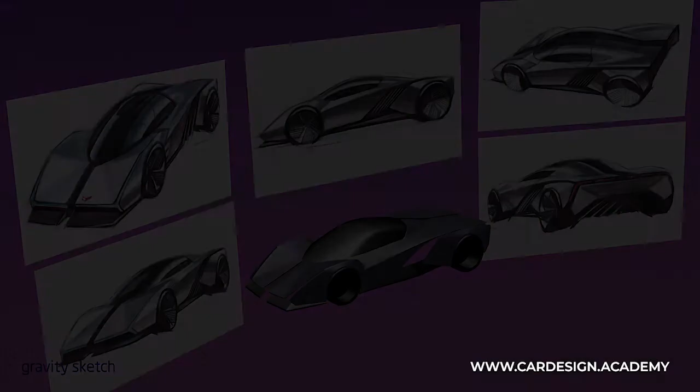Welcome to CARDESIGN.ACADEMY. Today I'm going to get started on the exterior model for my Dark Synthwave next-gen Corvette concept, and I've chosen this environment and color scheme.

It's very in keeping with this retro 80s synthwave look with the big floor grid, really trying to capture this planar, geometric surface language with very folded surfaces, very minimalist, with a strong exposed heat sink pattern that repeats throughout the vehicle, which is functional for displacing heat from a high-powered battery system.

In the last video, I set up the vehicle package using a set of wheels I built to a known set of dimensions, the C8 Corvette wheels and tires, then placed the sketch in the environment at life size along with the mannequin. So I have everything I need to start a competent model, so let's get started.

This tutorial will show you how I approach designing an exterior, and you'll see it can be done quite rapidly. This is my exterior layer, so I'm going to go ahead and get started.

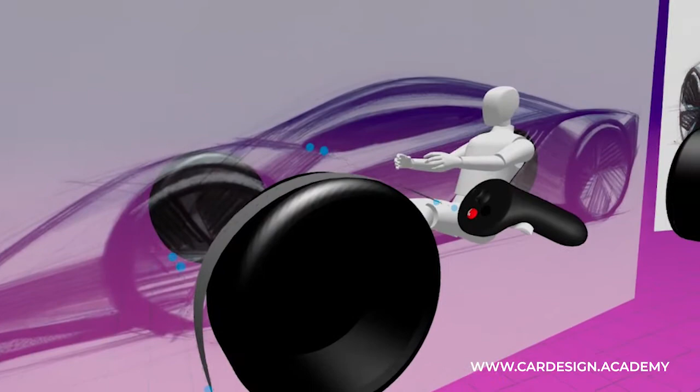I'm going to get that adjusted a little bit, grab the points, and get it aligned in. I'll turn it back to smooth view later, but you can see I'm using Smart Move, where I align my controllers to do a nice even movement in a single axis.

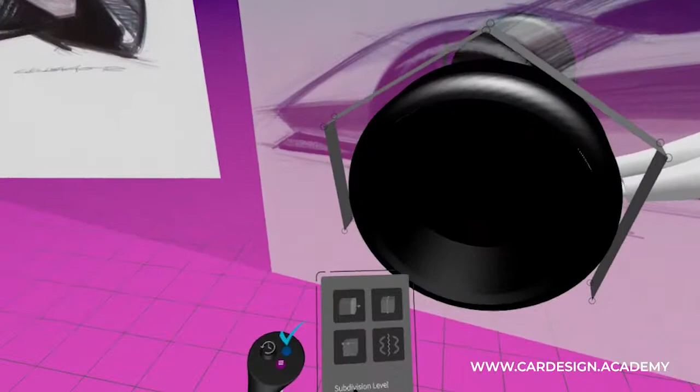Turning it back to smooth view, you can see it's starting to become quite tight and concentric to the rim. I'm just going to tighten up the front here a little bit, and that's looking quite tight, quite even.

Then I'm going to grab the entire inner row of control points. I selected auto select loops, grab this whole section and slide it in, and then create a back wall.

I'm going to use the extrude function. As I'm grabbing this row, I pull the trigger, which extrudes an additional row of loops there. Then I grab those and start to scale them in.

If I go back to poly mode, you can see what I'm doing here. I'm just going to even that out with the ground. You can basically shrink this as much as you want, and I can even take this down so it's nice and even with the ground. You're not really going to see it, so it's not super critical that it's perfect, but I try to get it as even as possible.

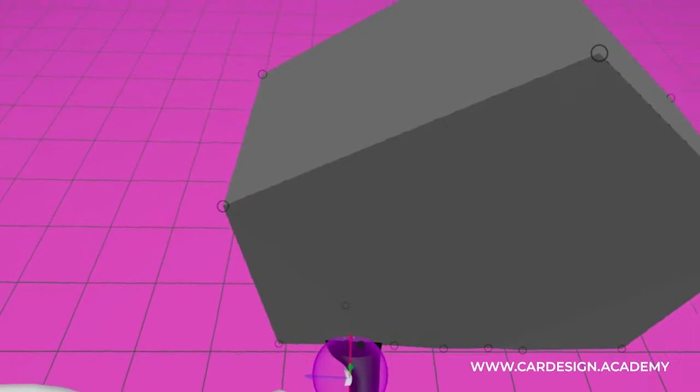I also want to get all of these more or less vertical. If I turn this back to smooth view, you'll see that it's a very soft shape.

So what I'm going to do is start to add edge loops to control and make it a harder edge. If I go to the polygon view again, you'll see I select one of the edges and click on it very close to the next point, adding another row of edges. When I go back to smooth view, you see it's a much tighter bend.

Just to show you again, I'll add it in smooth view and you'll see what it does, like that. If I want to tighten it up even more, I can either take this edge loop and shift it out even closer, or add an additional edge. You can see it becomes very, very tight at that point.

I don't think it needs to be that tight, as it's just adding weight and complexity to the model. I'll probably also add a couple of additional loops at the very bottom here, and then I've got it looking pretty good off the bat.

What I'm going to do then is take this in Smart Move. I hold the right hand middle finger button and pull the trigger, which duplicates it and slides it along the x-axis all the way to the rear. As you can see, I'm going to have to scale it up a bit as well, so I'm just going to scale that up.

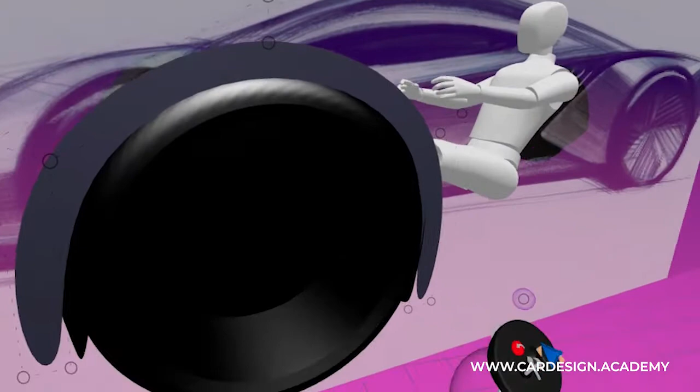Actually, before I get too far, what I'm going to do is grab this inner edge and add a hem flange to it. Because I want to tighten that up a little bit, since I want it to overlap the wheel tub.

And bring that up until the wheel tub is just about to be exposed. And it looks nice and tight and concentric to the rim.

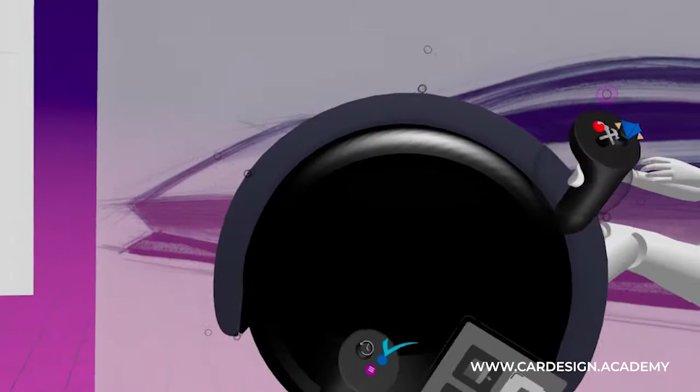It's looking pretty good. Bring it back down. Okay, so now this wheel flare's a bit thick. It looks a little trucky to me.

So what I'm going to do is add a row of edges here, and then grab the outer row and delete it. So that gives it a much thinner, slimmer look.

Okay, so now I've got to do the same to the rear. So I'm going to grab this one, duplicate it, slide it to the rear. Let's see, running out of space here.

Okay, I'm going to shift it out a little bit at the same time. Oops. So I'm going to grab the flare. As I'm shifting it back, I'm going to grow it a little bit. Okay, and then turn on my control vectors.

I think what I'm going to do this time is just simply add points here and delete here, so that'll kind of preserve my geometry. And just sort of tailor it to fit the wheel tub.

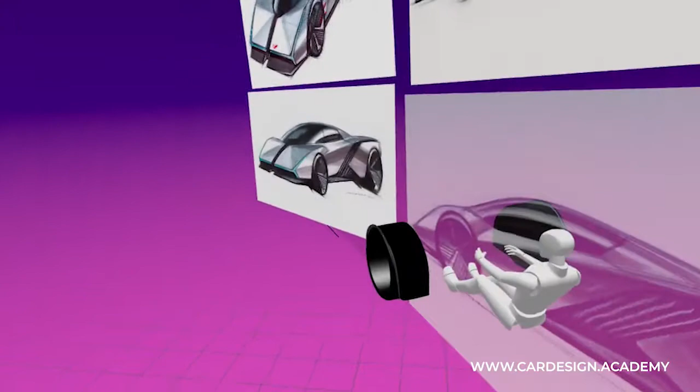Okay. You can see the wheel tub is coming, so the hem flange comes in just underneath that wheel tub. And just double check that. Double check the front. It's looking pretty good.

Okay, so very good. So the next thing I'm going to do is start to set up my center line. So I'm just going to go ahead and save what I have right now.

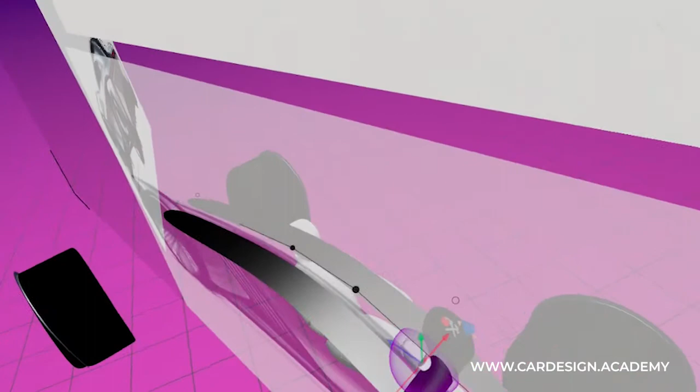Okay, and I'm going to grab the inner row of points, and as I pull them towards the center plane, you can see they just snap to the center plane. Everything welds together very nicely.

I can bring these out a little bit, and then I'm going to extrude another row, and bring that row down a little bit and start to add a bit of curvature.

And yeah, maybe bring it just a little bit wider.

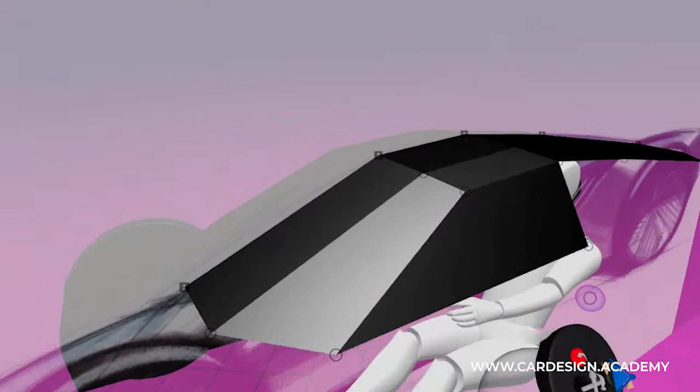And then I'm going to start to establish my side glass plane. So I'm going to come out with an extrusion here. Might be easier to see in Polyview what I'm doing. I'm going to grab this point and bring it to the front here and connect that. So you can see to connect a point, all you got to do is just move it close to another point, and it'll just snap together. So easy. Same thing back here. I'm going to snap that together and bring this all the way back to the rear.

So go back to smooth view. I'm probably gonna have to do a little bit of tailoring here.

Okay, so just to make sure I have enough width to this cabin, I'll bring this out a bit.

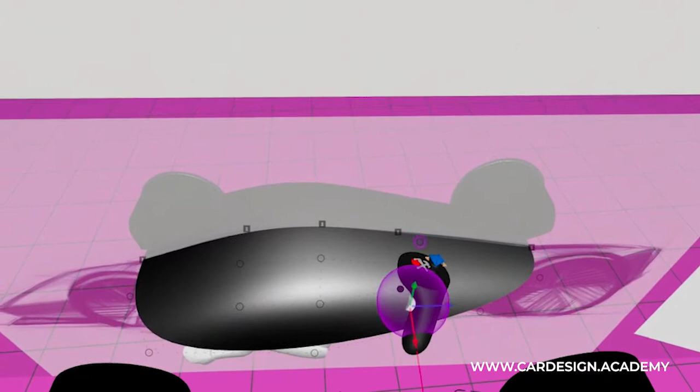That's looking pretty good right off the bat. You can see there's a nice, if you look at the sketches, there's a very wide shoulder. So there's a wide offset.

Oh yeah, one thing I do need to capture is this dip in the belt line. So...

I'm gonna add another row of points. I'm gonna bring that down here. Actually, no, I'm not gonna do that. What I'm going to do is bring the cowl down below the fender, because that's really what's happening.

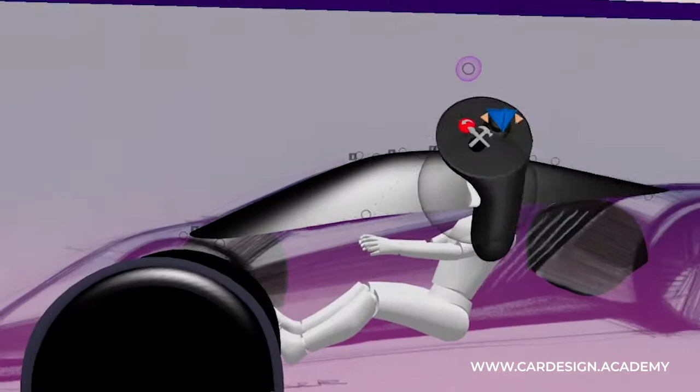So I can get rid of that edge there.

Okay, it's looking pretty good. Bring this forward a little bit. Okay. Not trying to get it too perfect yet. Oh yeah, that's looking good.

Okay, so I'm just going to do a quick check here. I'm going to turn off the side view sketch and just kind of look at it from an end view and make sure I have enough width to the cabin. Just make sure the driver's got enough shoulder room and headroom. And I think he's in pretty good shape.

I might just widen the cabin a little bit more. Maybe not, I think I'm just going to leave it as is. It looks like a pretty nice tight cabin.

Just going to double check the geometry here. Yeah, that's what I thought. Okay, so I'm going to just adjust a few of these points so I can get rid of some of the holes.

Yeah, it's much better. Okay, great. Okay.

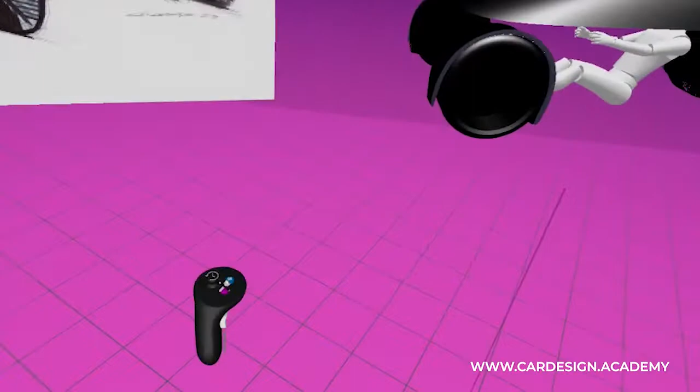So next, I'm going to start to build the body. Okay, so I'm actually going to label this layer. I'm going to put this on a separate layer and just call it glass. Glass. Okay, and then I want to lock this layer, start a new layer. And this will be the body, so I'm going to call this body.

While I'm at it, I better grab the wheel flats and wheel tubs. I'm just going to put those on the body layer. Okay, so now I can lock the glass layer. I can't grab it, it's not there.

So okay, so now I'm going to select my body color, and I'm going to turn my sketch back on, or my side view, and just move around the room a little bit.

Okay, so now I'm going to start building my center line. So on the front end, this upper line actually represents a fender. So I'll just build to the sketch first. But actually this is a fender line.

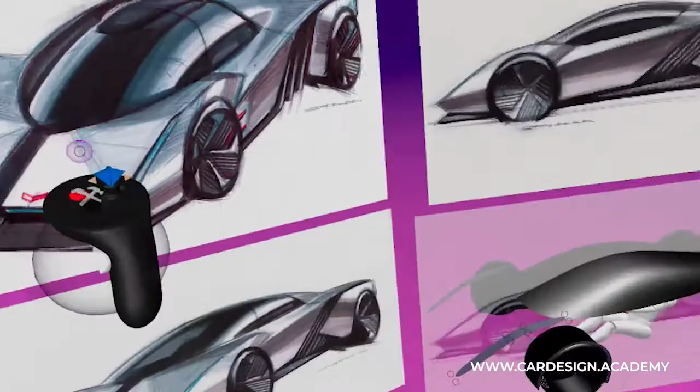So I'm going to shift it out and turn on my control points. If you look at the sketch, there's almost no plan shape to these lines. This is something new to me. I'm used to putting a lot of plan shape on lines, on curves.

What I think I'm going to do is just go to poly view, because I want this car to really have a lot of polygonal geometry to it. So let's get it right in the polygons first. It's very important to really just look at the car as a series of polygonal shapes.

Okay, so this is a very complex surface on the hood that I'm trying to do. I'm not going to get too deep into that just yet. What I am going to do is just build a quick center line, which is almost just a perfect extension of the windscreen.

So I'm going to grab that and snap it to center. I'm going to leave this in poly view as well. Actually, yeah.

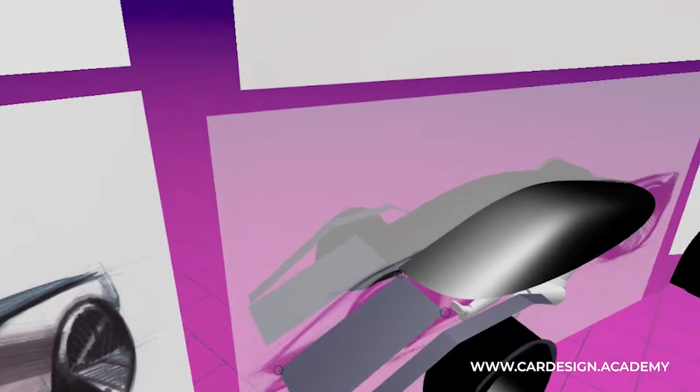I'm going to leave this gap in the center because that's what's going on here. So I'm going to bring this out and actually bring this point in to start to get that folded origami look.

Now, if I want to take two objects and bring them together, I'm going to turn on my tool set. Oh, no, not that one. Okay, this sort of brush and hammer crossing each other.

I'm going to hit that button, and I have a set of tools here. And what I'm going to do is merge. So I'm going to grab - I already have this object selected. I'm just going to click this object, and then these two are now one object. And now I can snap this point to this point.

Okay, and then what I can do is extrude a square off of here, connect it here, and not quite getting that. Okay, there we go.

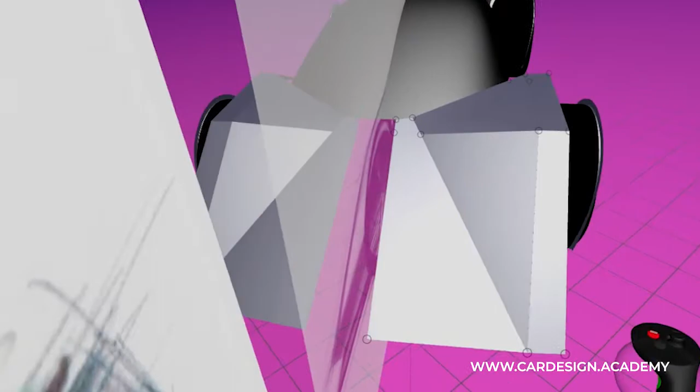So see, it's starting to get that kind of faceted origami look that the sketch has. So I'm going to leave that as is for now, and now I'm going to start to work on this belt surface. You can see this sort of belt and shoulder surface that runs all the way up the rear fender. I'm gonna kind of eyeball it and follow the sketch.

I'm gonna turn that on to poly view as well to make sure I've got the plan shapes right. You can see the plan shapes all over the place. So I'm just gonna work to get a nice sweep going there.

Okay, so not quite there yet. What I'm doing is I'm kind of sighting down the line and looking for any sort of snaking.

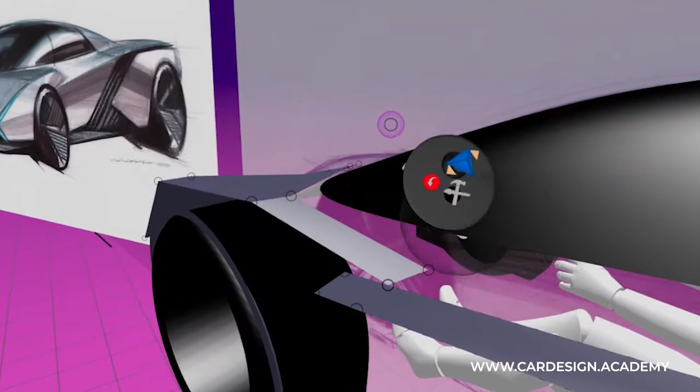And we'll work on getting the wheel lips attached as well at a later point.

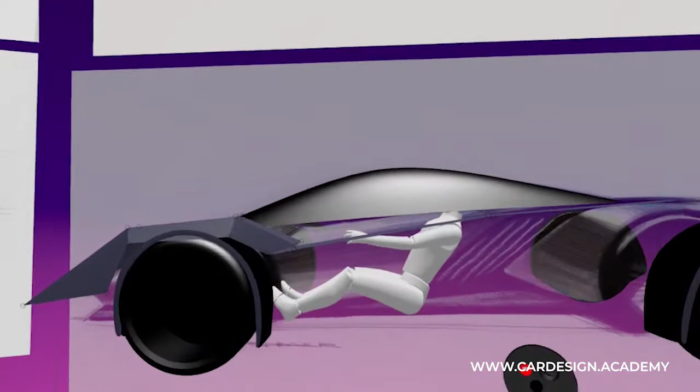Okay, so I just want to delete this point here. So that's all one surface. One thing you want to do as you're building polygons is you want as many surfaces as possible to be four-sided. So try to organize your polygons in such a way that everything is four-sided.

So one thing I need to do now is work on getting this shoulder surface brought up to the belt.

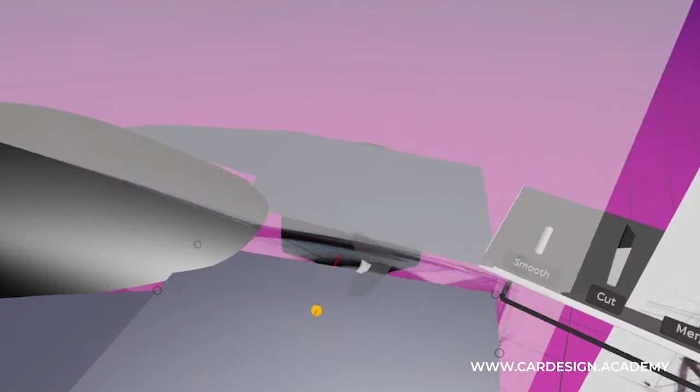So this belt surface or the shoulder surface is going to twist from almost dead horizontal to catching more light here. We'll see if that works or not.

And then I'm going to start to build my body side.

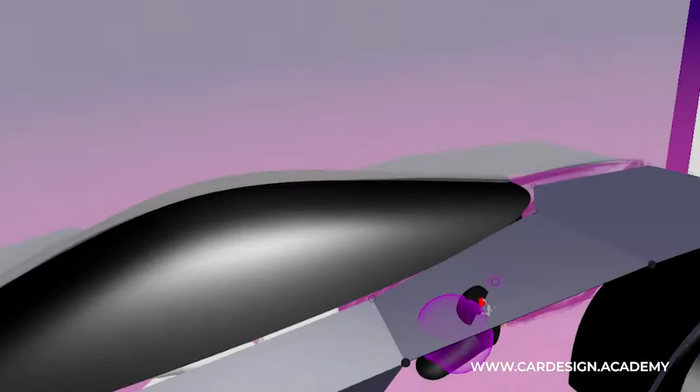Okay, so what I want to do is try and align this graphic. So I'm going to bring this line back and up a little bit. And that way I can bring this back to line up with the graphic. And I want that to cut sharply under so that it can really catch a lot of shadow.

Okay, and then this rear wheel volume is going to be a separate shape, so I'll get to that later. What I think I'm going to do now is begin to connect the front wheel.

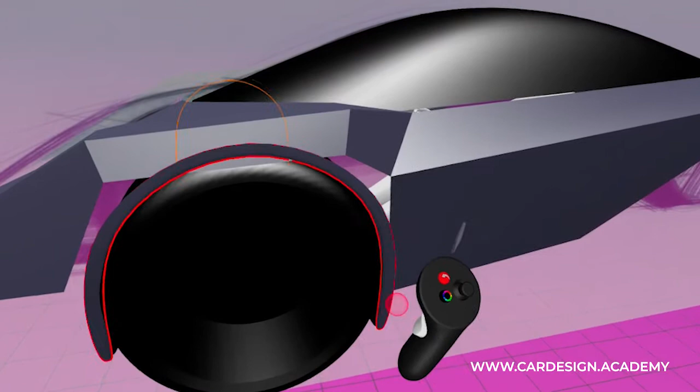So I'm going to select my tools here, merge them together. Make sure that I'm merging the correct thing. Okay, so you can see that the alignment of the polygons is quite different.

So I'm going to have to reorient my geometry quite a bit to get that working properly. So what I'm going to do is I'll just start working the wheel. So this is going to go way out of round, but we'll fix that. And it's nice that we have the wheel tub to work to.

I'm going to add another row of edges here. That's going to align my center polys here. Yep, align those. And then I'm going to add another row here. And that's actually gonna align this together.

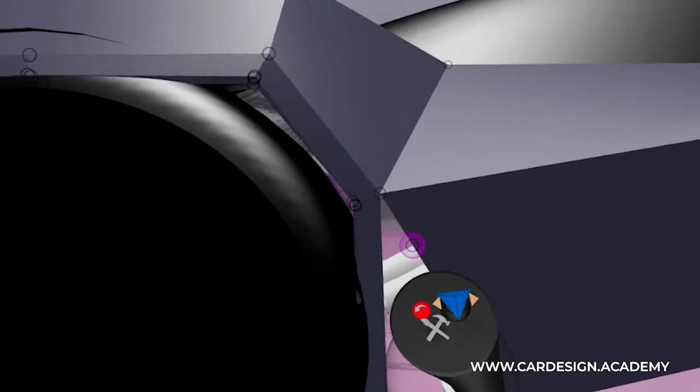So as I get down here, I'm actually going to add another row of edges right along here. This is going to give me a tighter break here, which I want anyway, and that gives me a four-sided shape to connect to my wheel flare.

Okay, so it's going to be very, very non-round, but we're gonna work on that in a minute here. I'm gonna add another row of edges here that'll connect to the front corner.

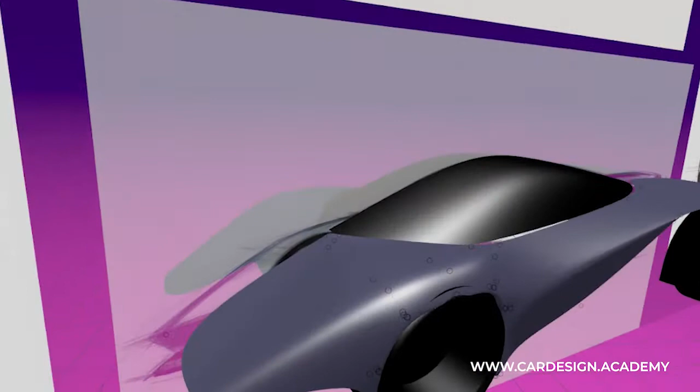Okay, so I'm gonna have to go in and retune this so you can see as I go back into Smooth View, everything is very doughy, right? We'll go back and we'll have an opportunity to fix that.

But really, what I'm interested now is just getting the wheel flat aligned here. Also, I just need to get a tighter edge on that wheel flat so I can see it.

All right, so I just want to grab this one. Okay, and just get this thing tuned back into a round shape. I may have to add an additional row here just to control that edge there.

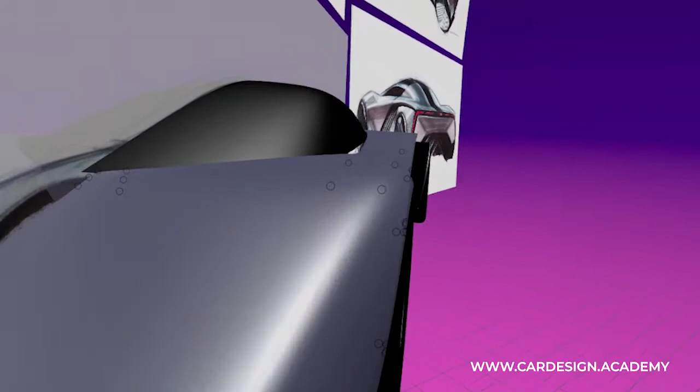That's starting to look round again. Very good. Okay. Turn my polys back off. So now I have the construction I want, at least in the wheel flats.

Okay, what I want to do now is to do this bottom corner. Okay, so as you can see, the bottom corner actually splits off and becomes the headlamp.

So what I can do is actually delete this surface here, and that's going to form a gap for the headlamp, and then I'm going to bring this back. Now the headlamp is a much slimmer shape, so I can basically bring this out to a sharper corner.

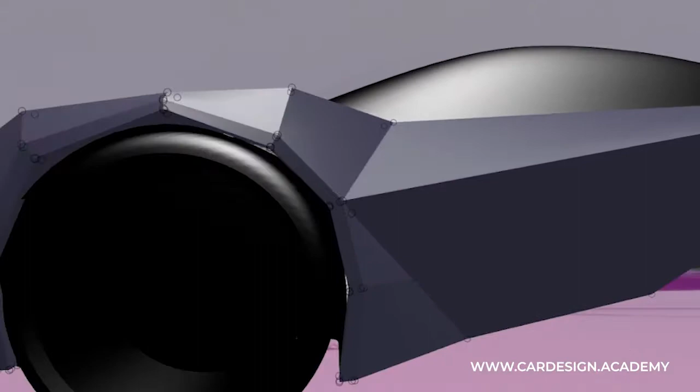Okay, looking good. Oh, this isn't quite connected. Very good.

Okay, so starting to get the theme here. It's still very rough, but I just want to get the whole car blocked in. I think we can drop the bottom of the front. Yeah, I'm just sighting it down the sketch here.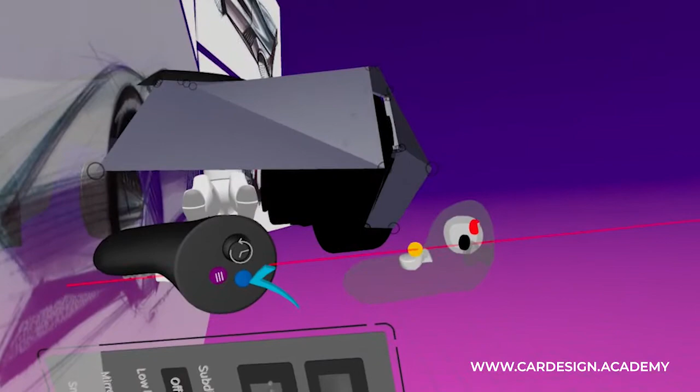Maybe bring this in a little bit because I want to have a more pronounced edge. Keep it kind of square. Okay, bring this in a little bit. We're going to be playing around with this thing quite a bit.

Okay, so I'm going to start building this rear section, which is graphically detached. So I'm just going to be working two polygons right now.

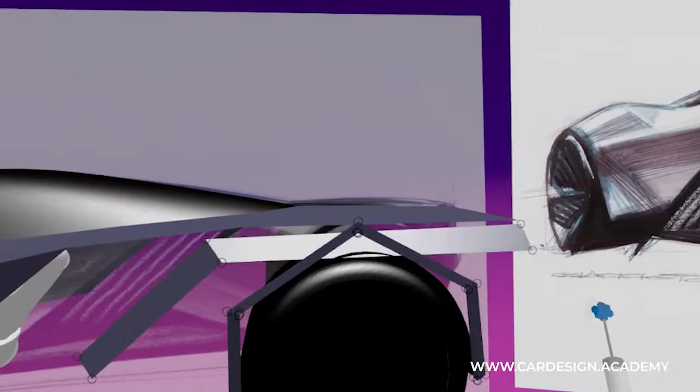I'm going to go ahead and merge with the wheel flat. There we go. That way I can at least start to align my polygons.

Let's turn it on again.

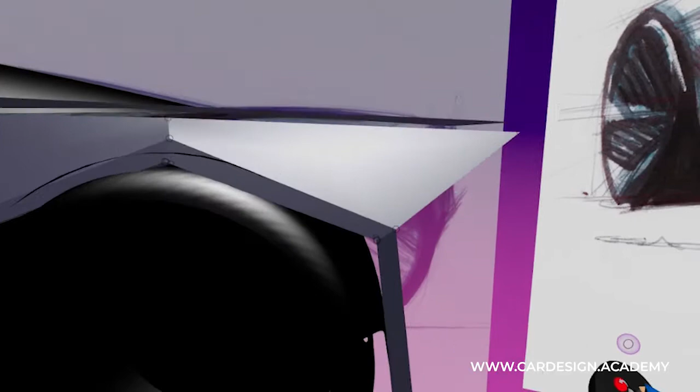Okay, and I'm going to put that tighter edge on the flat. Okay, now I can start to bring my flat back up.

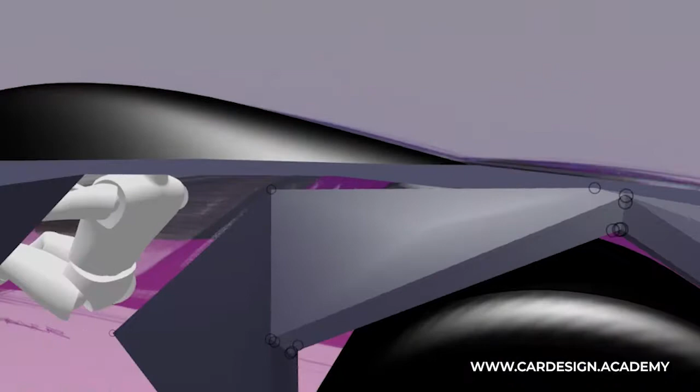I'm going to go ahead and add a row of edges back here as well. I think the whole rear just needs to come up a little bit. I'm just trying to get these polygons aligned, even though they're going to be graphically separated.

This thing's going to have a very, very short rear overhang. So as you can see, when I turn on smooth geometry, it looks very, very messed up. So now I'm going to go in and start strategically adding edge loops to tighten up the edges.

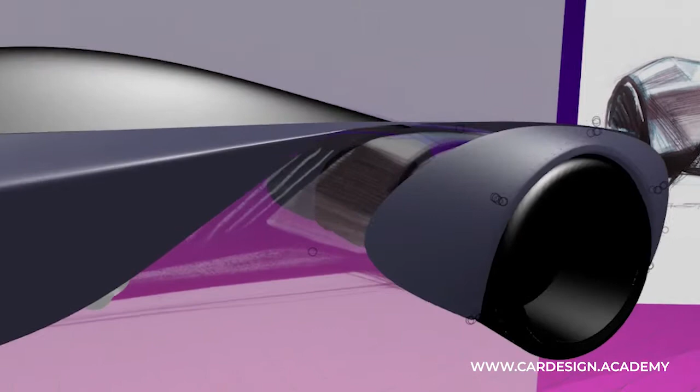As you can see, as I'm adding additional edge loops, it's starting to throw the wheel opening out of round. So I'm just going to go ahead and compensate by moving some of these control points around. Let's use our smart move.

So it's starting to have a more faceted geometric look to it.

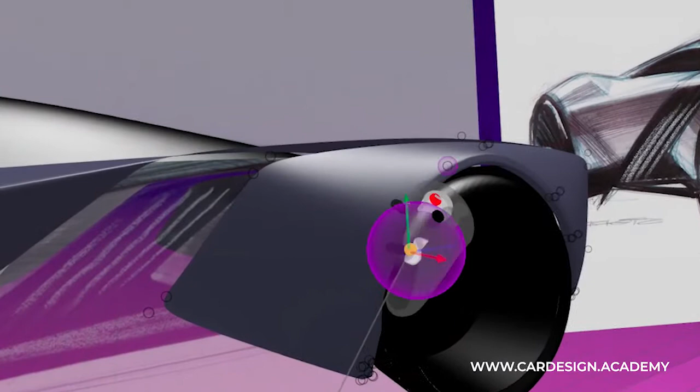I still want to have a bit of a bone running through here, so I'm going to just add another edge here and then compensate the wheel flat this way.

Yeah, so that's starting to look the way I like it. So now I'm going to turn off my... I'm going to save what I have again.

And I'm going to turn off my side view. I'm going to turn off my sketches too. I just want to kind of get a long view of the car. I'm looking at it now in full size. It's looking pretty dramatic.

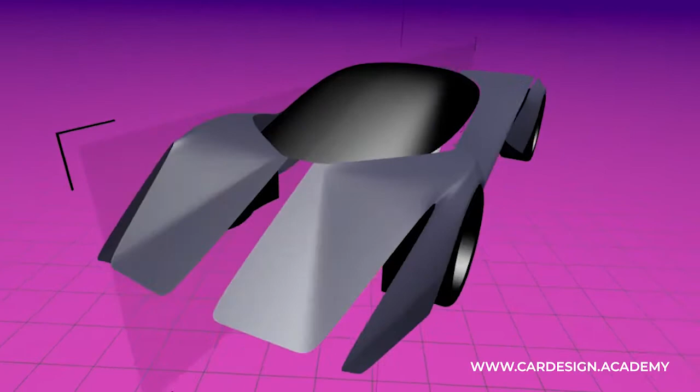Okay, I turn my sketches back on. I'm just going to dim them down a little bit. Maybe not. Yeah, just dim them down a little bit so I can get kind of a nice long view.

Okay, so now I'm going to do a bit of refinement. Let's just do a quick time check here. Still recording at 43 minutes.

All right, so what I'm going to try to do is keep this to an hour, and then we'll do further refinements later. Okay, so one of the things I want is a sharp edge here, but not here.

So what I'm going to do is start to spread these edges further apart, so they sort of flare out from each other, and so by the time you get to the very bottom of the car, it's very smooth. And then I'll tighten that corner up a little bit.

Okay, and I'm looking at the relationship between this point and this point. Maybe bring this point down a little bit.

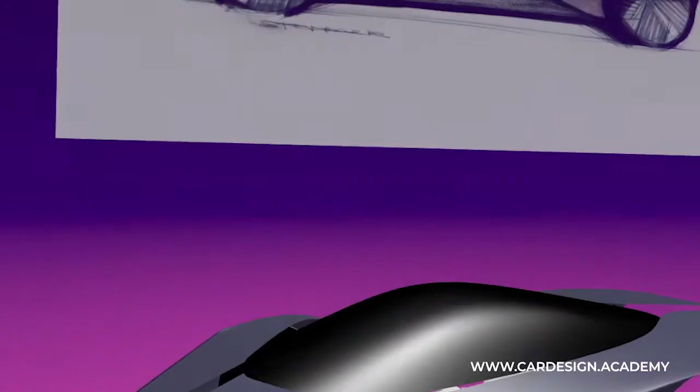Okay, so one of the things that I'm noticing is that the back end of this fender is coming down, but here I've got it crossing over, so I'm going to have to work on that a little bit. So just to kind of explain what's going on here.

I need to get this edge coming down like that, and then there's a little zigzag there. Maybe come down and zigzag like that.

Something like that. So I'm going to start working on this geometry here. When in doubt, go back to polys. What I'm going to do is delete these sections here and see if I can find a solution.

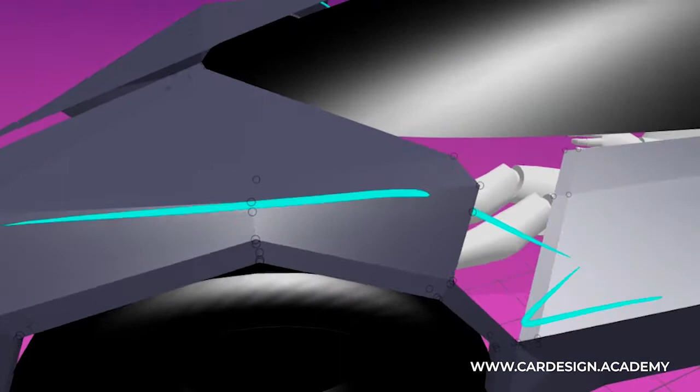One of the things I might do is temporarily delete some of these additional edges. I don't want to delete that one just yet because it's forming the headlamp. I'm going to add an additional edge here and here, and get rid of this one.

Now I'm going to create a band that connects from here to here and very closely follows that surface. Then I just need to bring this one back to get rid of the twist. Maybe bring it back a little further. Okay, then we're going to fill this in with a square.

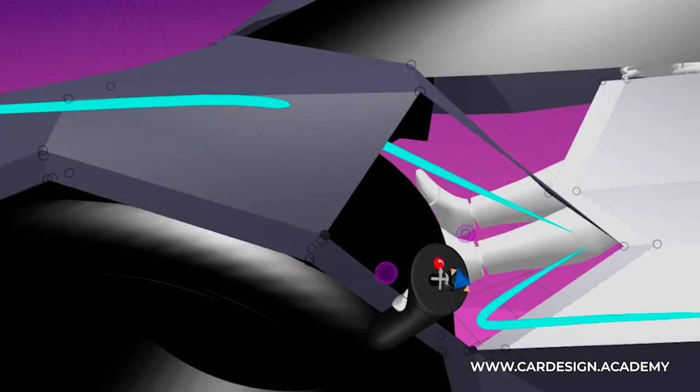At this point I'm going to get rid of these pencil lines, ink lines, and let's just turn on our smooth view. It's starting to look a little more like my intent. It's keeping the line more linear.

So what I can do is just add an additional edge, and that really starts to tighten it up. Maybe add an additional edge as well here, but let's fill this in first. Let's see what we've got here.

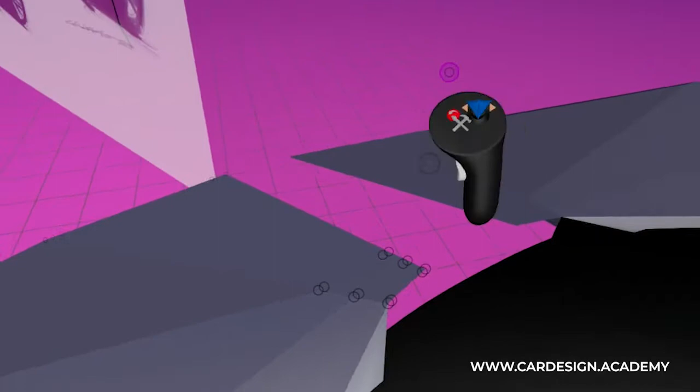Now I need to figure out how to deal with some of what's going on here. So what I'm going to do is just bridge all the way to here, and then we may have to cut some of that away. I'm going to temporarily delete some of these edges here.

What I'm trying to do is just fill in some of these connections here.

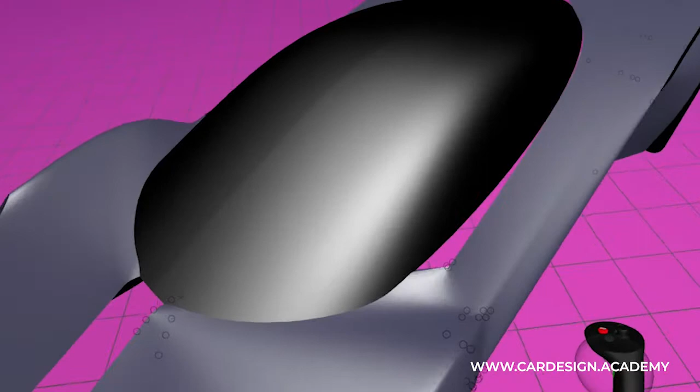Maybe this has to come up here. No, that's going to get me back to where I was. It's actually starting to look pretty good.

This is probably going to be the most complex area of the vehicle. One of the things I'm going to do is I want this sharp edge to come to a stop here, and I don't want it to continue down the body side.

So what I'm going to do is use this tool, Collapse Polygons, and that's going to let me merge one point to another, and then I can delete. I can just select this row of points and delete it. Now if I turn on, I have a nice smooth section again here, and this edge comes to a nice hard stop right here.

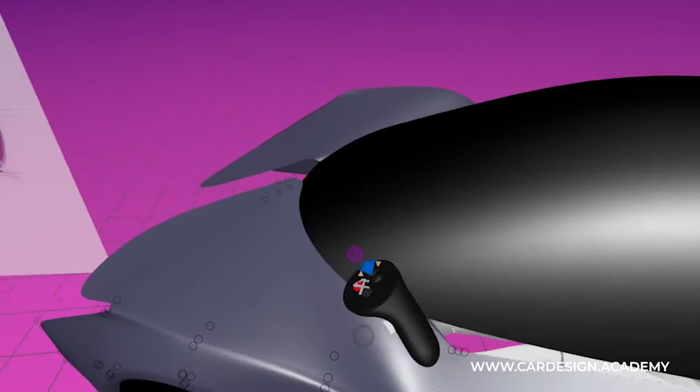But I still have to figure out this area, where none of the sketches really quite defines it, so I'm going to have to figure that out.

What I'm going to do is build a little bevel surface across the belt line.

Okay, I'm going to temporarily, let's see, let's see if we can put an edge there. Okay, let's just see what we have. Now we're starting to get a defined edge. It's not at all aligned with the canopy.

So I'm going to go ahead and start adding back some of those additional polys. We're starting to get that origami look again.

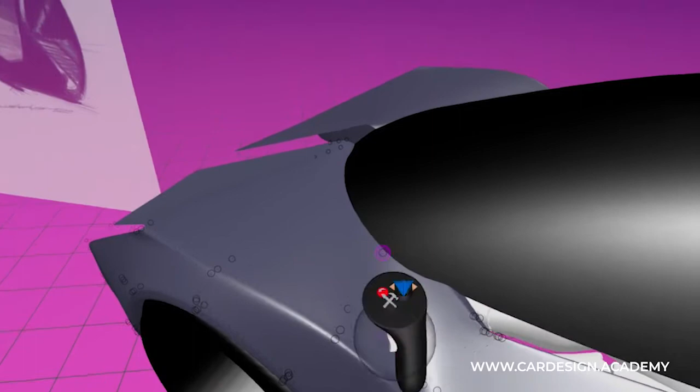Okay, so I'm going to temporarily turn the glass off. So you can see I have this plan shape that has nothing to do with my canopy, so we're going to have to fix that. You can see I've left the glass layer - actually I'm going to leave the glass layer transparent so I can see what's going on.

I'm going to start to add some additional edges. Actually, I'm wondering if I can just grab these guys and bring them over. No, that's not going to work. Okay, maybe grab this one.

So yeah, I'm starting to create some very torqued geometry. I don't think this is working. It's a little bit of trial and error when it comes to polys.

So let's go back to - oh, that's starting to look a little better. You know, if I just do that, I wonder if I just bring this over here. It's looking up, that's looking quite a bit better.

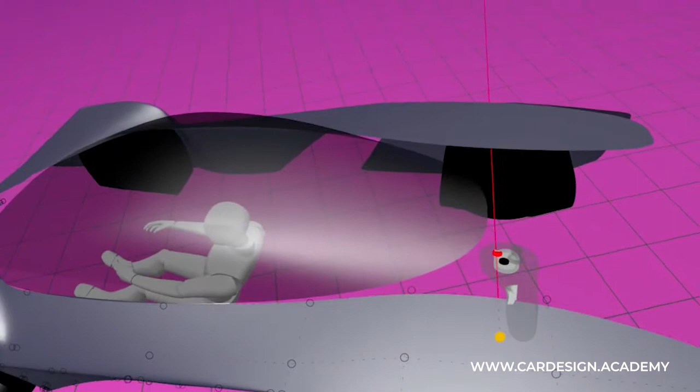Now if I bring it forward, it's starting to align better with the cowl. I start to spread these out. It's starting to make a little more sense.

So then the question is, if I turn off the glass, I'm curious to see whether I like this more rounded shape of the canopy or whether I like this more faceted look of the cowl, and whether I decide to tune the glass to the cowl.

And I think that's exactly what I'm going to do. I'm going to turn on the glass, and I just think there's a lot more character in that cowl. So I'm going to start to add an additional row of edges. That's going to give me a much tighter bend in the rail, and I'm going to start to pull that back.

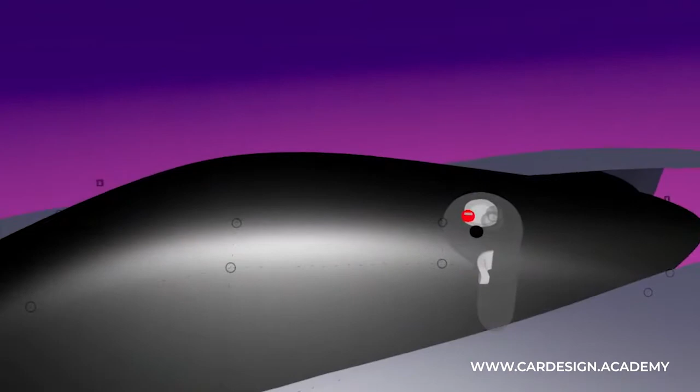And then I can soften it up quite a bit through here, so it retains that fighter jet canopy look. Yeah, that works. Maybe bring it down a little bit. Let me lock the glass again, and we take the main body. If I bring this down, I'm going to start to get a more dramatic hood. Oh yeah, look at that. Maybe I can go even lower.

So what I'm doing is trying to capture that graphic of the black stripe running down the center line. That's very important. To do that, I'm going to have to bring the cowl back up just slightly, but then I can bring it more forward if I want to stay dramatic. Yeah, look at that. Okay, so we're getting a little wonky here. We can do more surface refinements later, but now I'm starting to feel very good about this belt line and cowl. Not perfect, but I can fix it later. Okay, so another area that's giving me headaches. Let's go ahead and save that.

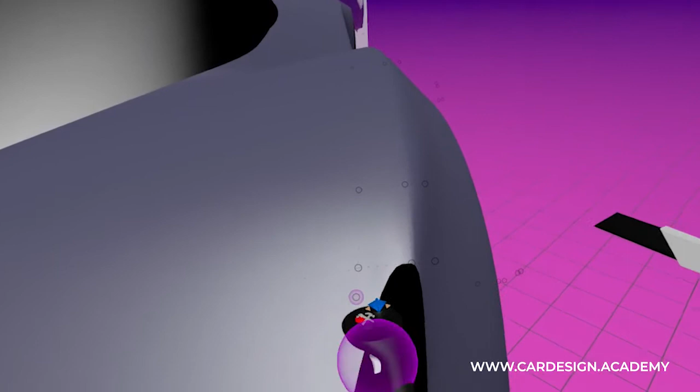So you can see that it's starting to get rid of some of the wrinkling. And then if I just start to bring this down, spread it out a little bit, and then add... that's starting to help out. If I add an additional edge here, that helps considerably.

Of course now my wheel is back out of round, so now I'm going to grab... this is going to be tough. I have to do it in sections here.

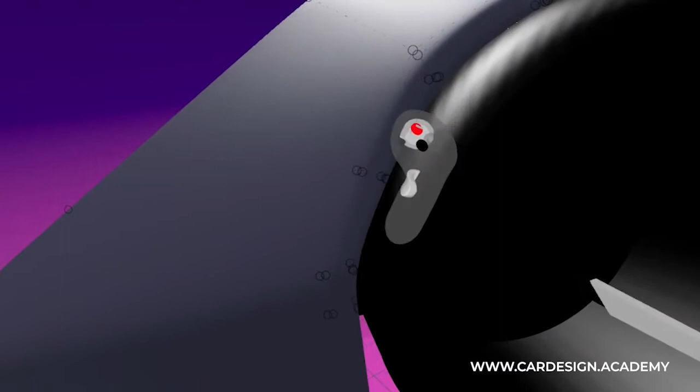I'm just adding an additional row here, and that helps to evenly space out these polys so that everything is more or less round.

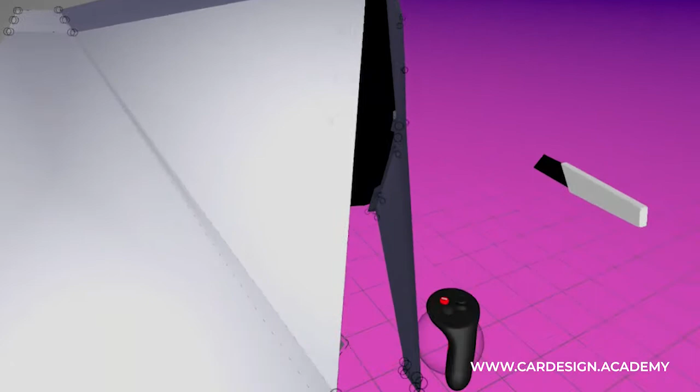So another thing that helps is to add a bit of a bevel to these openings. I'm going to auto select loops. You can see it's grabbing the entire periphery of this graphic here, which is fine. And I'm actually going to extrude down just a little bit here. So in poly mode, you can see what it's doing. I just need to grab this inside edge because it's so tight. Bring this in a bit.

You can see I've created this little beveled surface. And if I put an edge to it and turn on the polys, or turn it into poly view, it's quite tight now. So I'm going to tighten up this edge here using the edge tool.

So now I'm starting to get a very nice, precise quality to this thing.

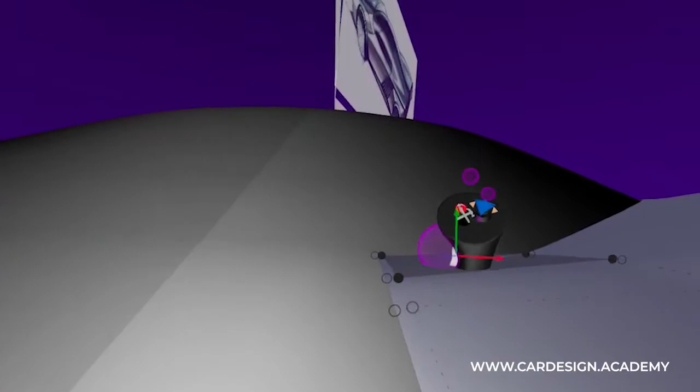So I think I just need to do a bit more refinement here. Okay, so I'm just going to add a beveled edge to this inside here. And I'm going to bring this all the way down so it intersects with this glass surface.

And then I'm going to connect it here. I'm just going to add another row of edges there and connect it there. And now I have this nice bevel here. Yeah, if I add a corner, that really tightens the corner. I want this thing to look really chiseled.

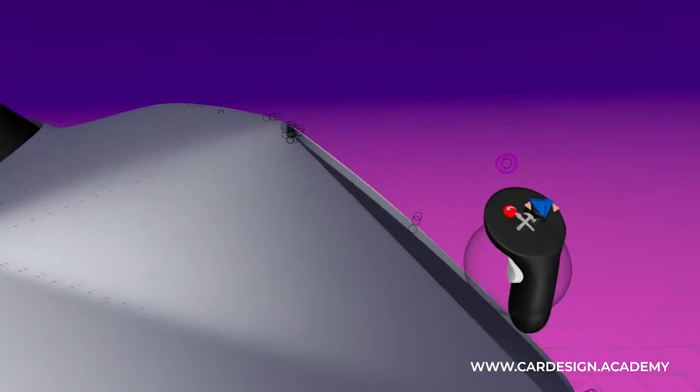I just want to put a slight bit of upward curvature, even though I know I want this thing to look faceted, which means I'm going to do the same here. I'm going to add just an edge here. It's giving me a hard time here. There, now I can just put a little bit of upward curvature on there.

So I'm really starting to capture this faceted origami quality that I'm looking for. It's still very rough, but it's starting to capture the flavor. So I want to get a tighter bend here, so what I'm going to do is just add locally a couple of edges here. And so now I have this five-sided shape.

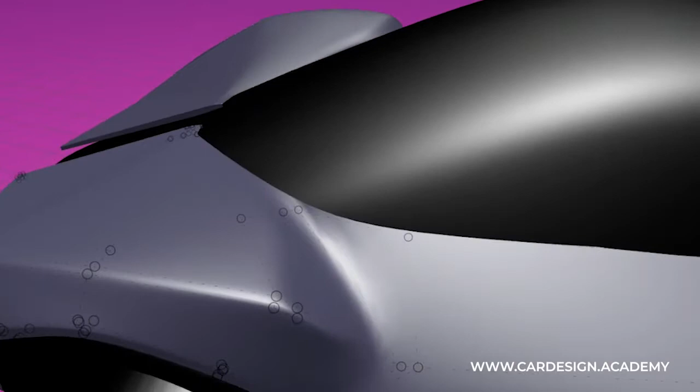Let's turn off my geometry for a second. Yeah, so it's getting a little wonky here. So I'm going to see what happens if I just collapse that into here, and it gets even more wonky. Okay, a little bit of trial and error.

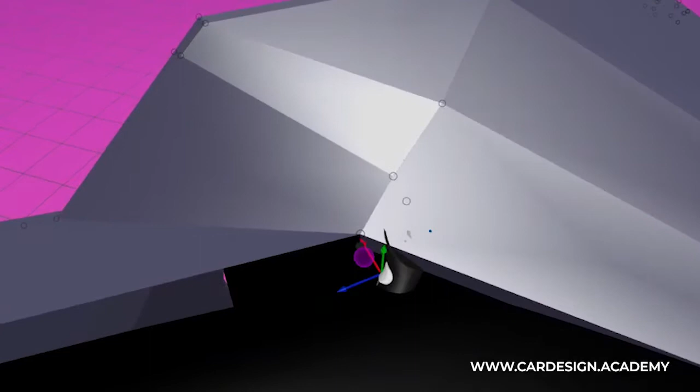One thing that might help is if I go ahead and add the bevel on the cowl here. So I'm going to go back to poly view, and just as I've been doing along here...

This is going to give me a little bit of a beveled edge that intersects with the cabin. Okay, and then what I can do is add my pull this one back a bit, and add an edge here to tighten up the belt line.

Okay, so now I have a nice tight cowl. I'm just going to add even another row of edges to tighten it up more.

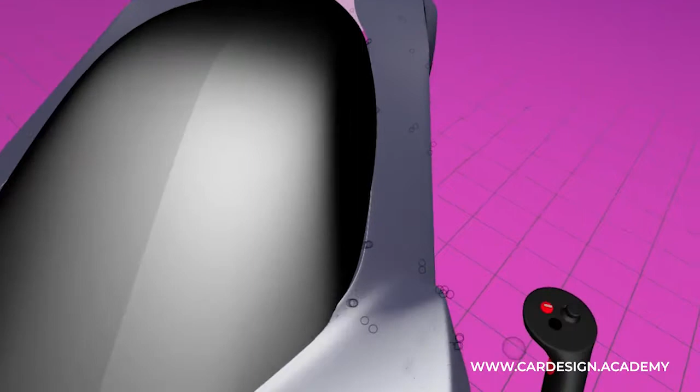Okay, so I'm going to take my glass, I'm going to pull the A-pillar back again a little bit, just to get back that really nice faceted quality. Then bring the shoulder surface out a little bit.

It's starting to look like the design intent. It's very rough, but there'll be some cleanup work to do. I think what I want to do before I finish out this session is to build out this kind of C-pillar area, this body color section.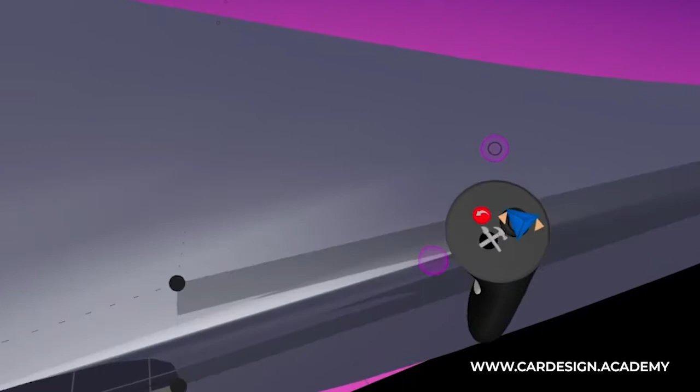So what I'm going to do is save what I have. I'm going to go in and temporarily delete these edges that are giving me this nice tight cowl, and go back to poly view.

I'm just looking at where this body color section is coming out. So I'm going to add another row here. And then out of this belt surface, I'm going to start to extrude out my sort of sail panel.

Leaving this little gap at the center line. It's going to be a graphic element.

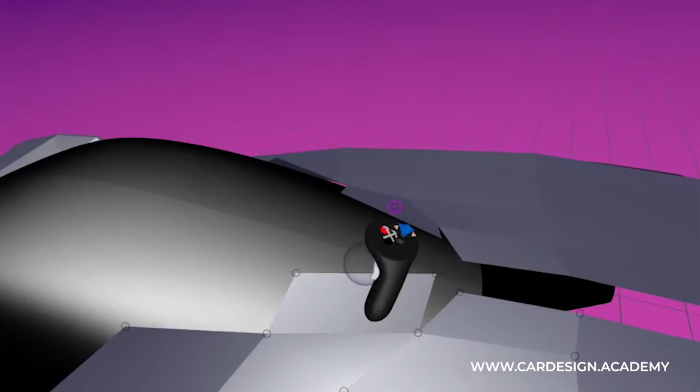Oop, I didn't want to grab that. Okay, and that bevel surface, I'm going to just continue that across the back here. And I'm going to do the same with this edge here.

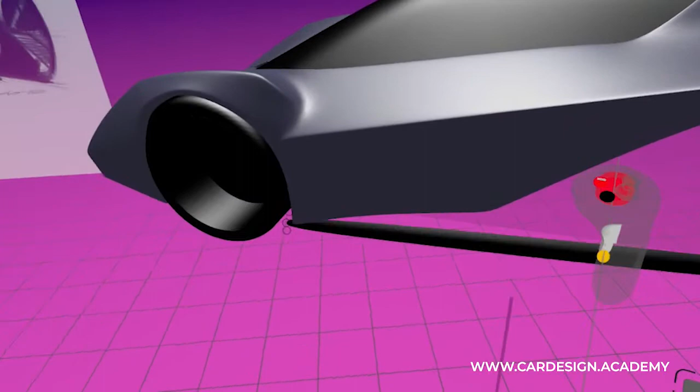Oh, and then, yeah, I need to give it that dark shader. Okay, and then we'll go in later with some of those heat sink details. But I'm just trying to give the car a more planted kind of stance to it.

That helps tremendously with the overall stance of the vehicle. So let's go ahead and do the same on the front here. Let's turn off the polys for a minute here.

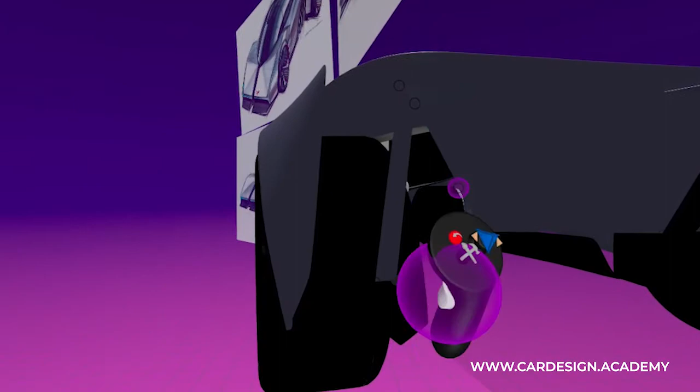So you can see back here I have this kind of faceted shape, which I'm going to try to replicate in the model. A little hard to see with the lighting, but I can shine a flashlight on it later.

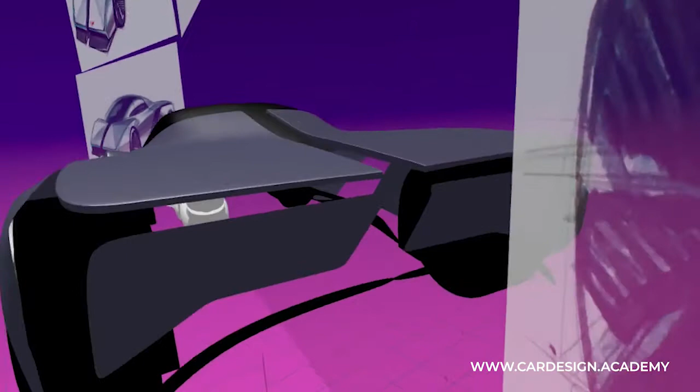And then finally, I'm just going to add a hint of a diffuser. Now, all of this is going to change, once I get into more of the refinement stage, but it's just helping me to figure out the overall gestures and volumes.

Okay, so I'm going to go ahead and turn off, save what I have here, and I'm going to turn off the sketches and just get a nice long view of the vehicle and just get an idea of how I'm doing. It's looking pretty interesting.

So I feel like in about, let's say, where are we at now? We're into the first hour, I think. 1 hour and 20. So in the first hour and 20, I think we've successfully captured the flavor of the sketch. There's a long way to go in terms of refinement, but it's got a really interesting flavor to it. Very chiseled, very precise. Definitely not of the current design idiom.